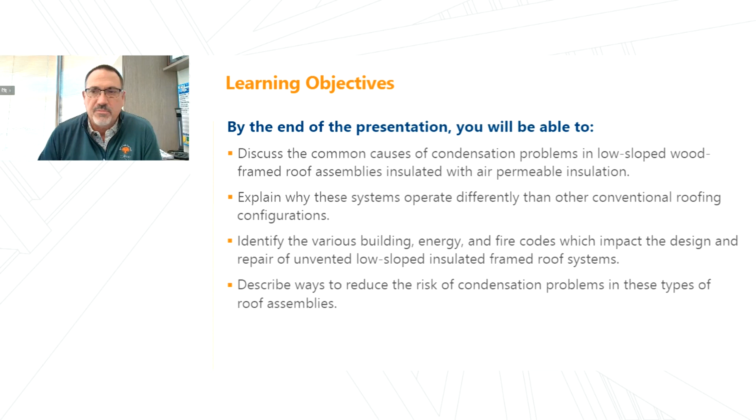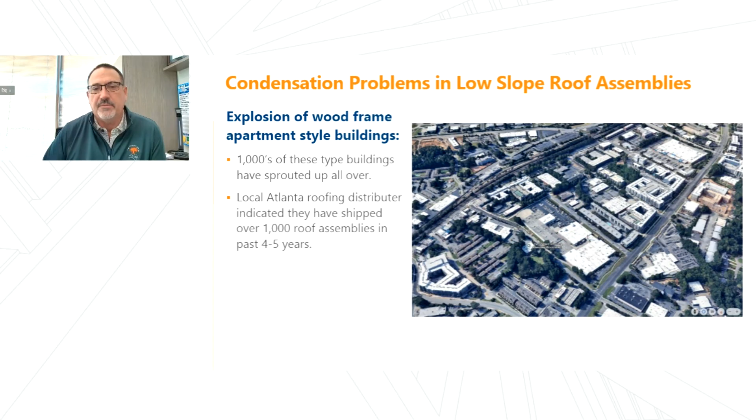We've all seen an explosion of these wood frame apartment style buildings in every city that you've lived in, and they kind of sprouted up all over the place for a variety of reasons. I've got a couple good friends of mine who are roofing contractors. One friend is a local Atlanta roofing distributor, and in the last 4 or 5 years he was telling me that they've shipped over 1,000 of these types of roof assemblies just in the Atlanta metro area. So it's a lot of buildings that have this type of roof assembly.

The problems with condensation have occurred in the past with some of the more northern climates where you might think condensation may be an issue. But we're starting to see and experience these same problems here in the Southeast and other parts of the country. Maybe it just doesn't take, we don't have as many days in the winter where it's cold for the condition to form, so it just takes a little bit longer to happen than up in the north.

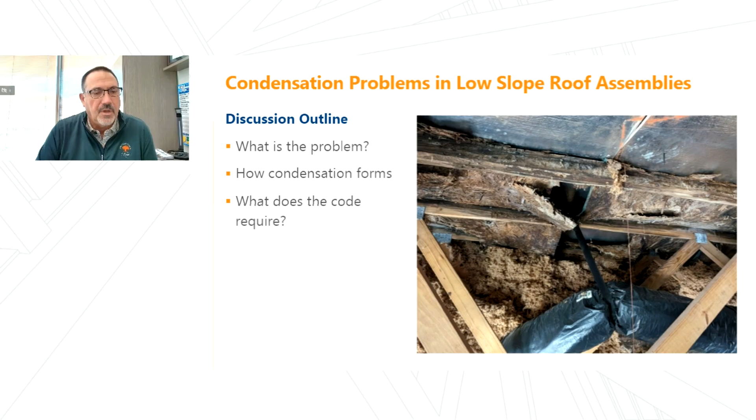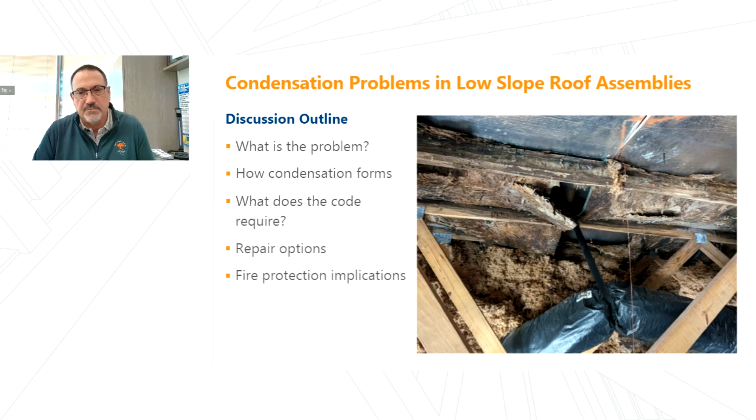So the outline for today's presentation: we're going to talk about what is the problem, how condensation forms in these roof assemblies, what does the building code require, what are some of the repair options and strategies that can be used to help resolve the problem, and some of the fire protection implications that result from the type of repair strategy you may employ.

Once again, these are wood frame apartment style buildings, typically 3 to 4 stories tall. They have a 1 hour fire rating for the primary structural members, exterior and interior walls, and the roof assembly. The roof cavity space on the top floor is filled with insulation, and there's no sprinklers.

Now, even though we're talking about wood frame construction, the problem is not unique. It happens with metal deck. It can happen with concrete decks. The issue's been around for a long time. We're just sort of seeing it maybe with a lot of these wood frame type buildings now to a greater degree.

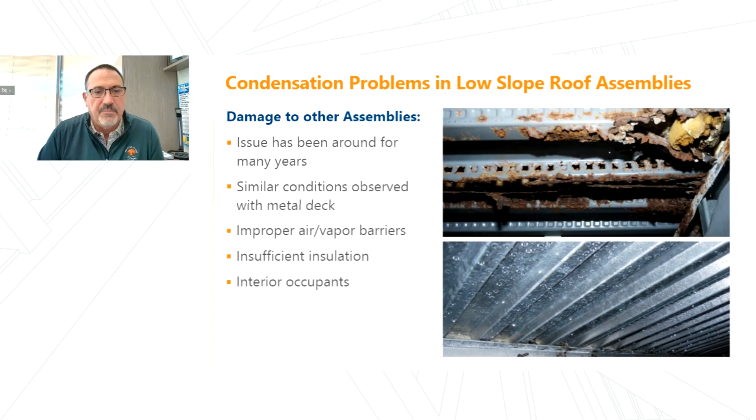It could be the result of improper air and vapor barriers in the assembly. It could be insufficient insulation. Interior occupants have an impact too—say if you have a commercial building with a natatorium or something that has a lot of interior moisture, that will certainly influence condensation and its formation.

For the typical low slope roof assembly we're going to be talking about, these are plate connected wood frame trusses generally, and they could range anywhere from say 2 feet to 3 or 4 feet thick, depending on how the trusses are constructed. This cavity space created by the trusses is filled with air-permeable insulation, usually blown in cellulose or fiberglass type of insulation.

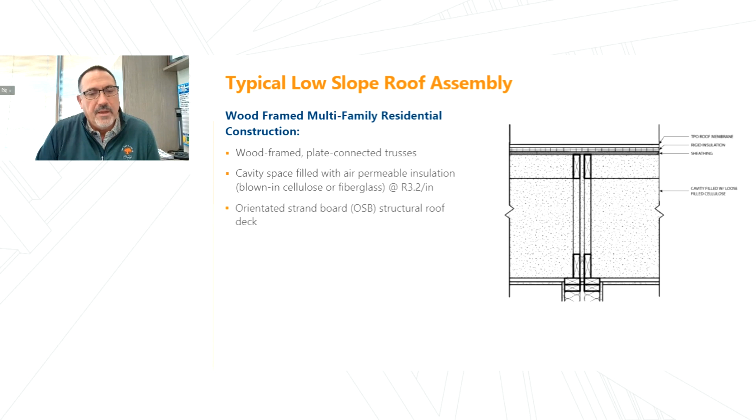There's an oriented strand board, OSB, structural roof deck that's secured to the top chords. Then a thin cover board may be used, or sometimes no cover board is used on top of the OSB. And a single-ply thermoplastic roof membrane is mechanically attached or fully adhered, usually a PVC or TPO membrane.

Again, there's no fire protection provided in this cavity space because it's filled with insulation. In addition to the space, there's also ductwork, maybe diffusers, light fixtures, exhaust ducts, and other things often located in this space as well.

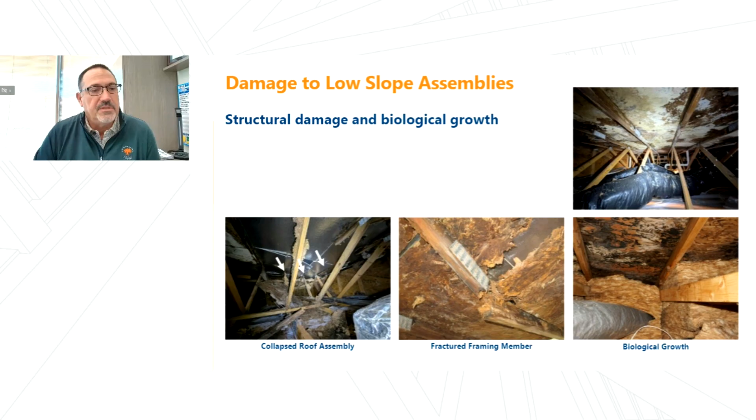Some of the damage that we see in these wood frame assemblies can be pretty catastrophic at times, and it can result in decayed, deteriorated, broken OSB sheathing. We see fractured structural members, and there can be a significant amount of organic and biological growth that forms on the interior of the space.

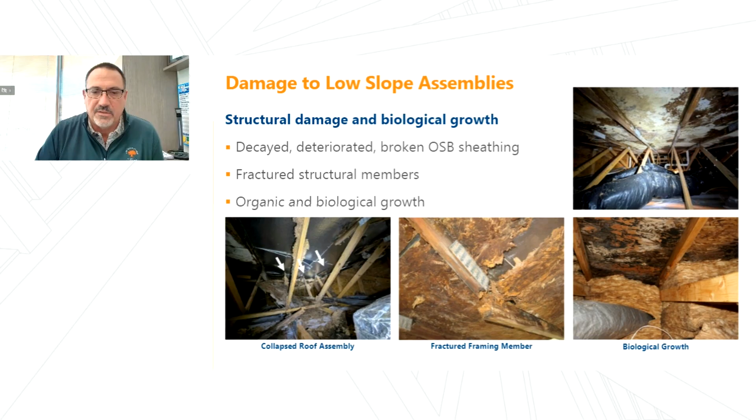So what's the source of the problem? Well, it's moisture. And how is moisture getting into this assembly? People think roof leaks might be a source of the moisture, and that's true. A roof leak can put water into this assembly, but generally a roof leak is going to be a pinpoint kind of location, a specific spot you can trace back to a condition on the roof. A condensation problem is going to be more uniform all over the whole roof area.

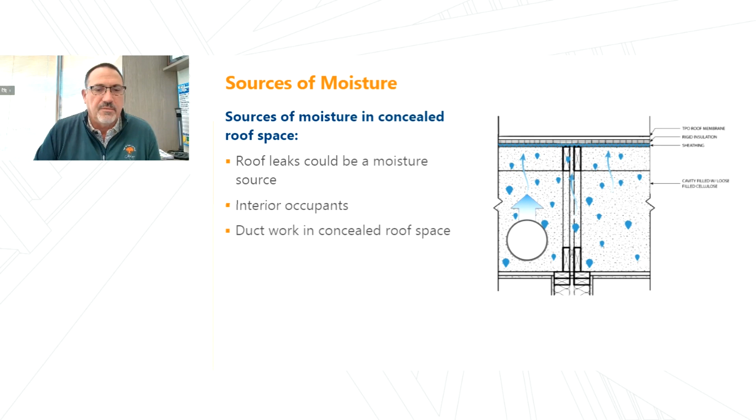Interior occupants drive a lot of the moisture, and the ductwork inside these spaces is also a source of moisture. In the wintertime, you may think of humidifiers - if somebody's living in one of these spaces and doesn't want dry skin, they might have a humidifier putting a lot of water in the air. Hot showers put a lot of steam into the space. Plants contribute a lot of moisture. Cats and dogs actually contribute a lot of moisture along with the people.

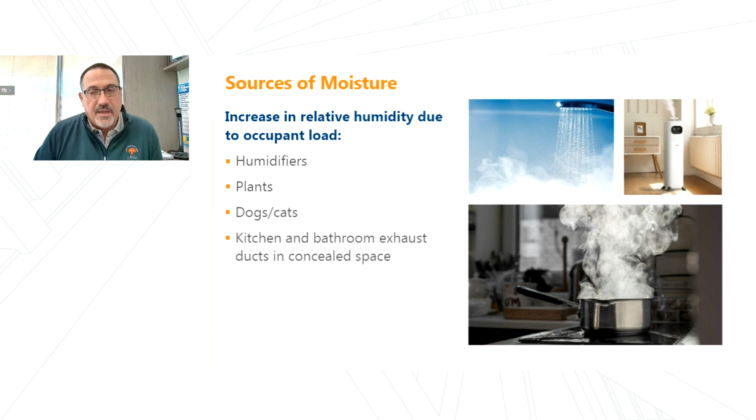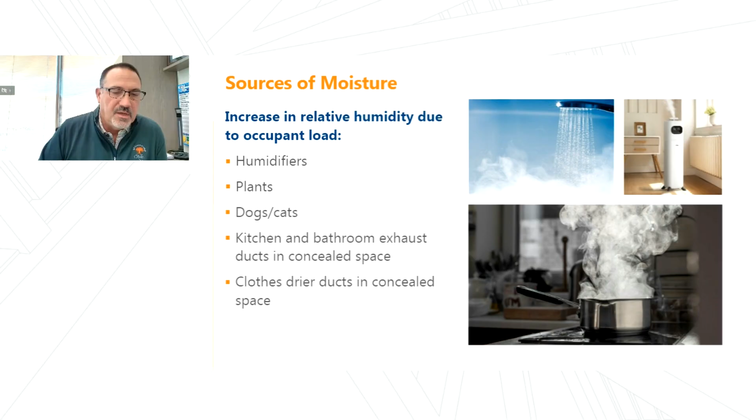We talked about the kitchen and bathroom exhausts. Ductwork runs through these spaces and transfers a lot of moisture from the kitchen and bathrooms through the spaces. Clothes dryers are probably one of the more significant contributors to moisture in these spaces - when you wash your clothes, steam goes through those dryer ducts trying to get to the exterior.

With all of these ducts, we're seeing a variety of conditions that could occur where air leakage from the ducts introduces this unwanted moisture into the space. Here are some photos of examples we've seen. A lot of them could be construction related, where they're maybe not connected or poorly constructed, but they do have a tendency to leak air even if they're constructed well. The building code allows for some duct leakage to happen with these things, even if they're constructed perfectly.

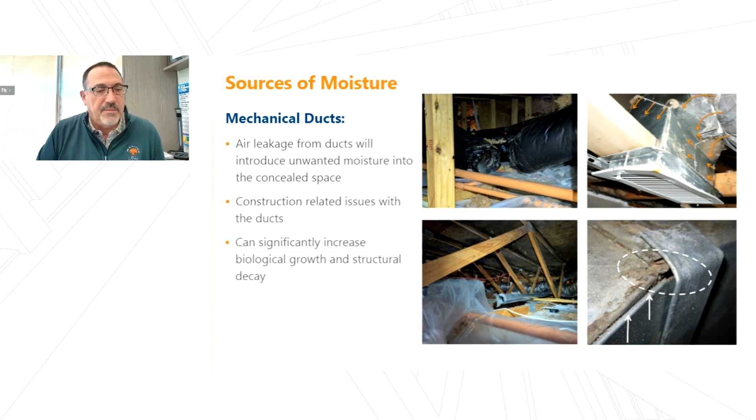They can be a significant source of the moisture that results in biological growth and structural decay of the wood members. There was an article in the IIBEC Interface magazine in November 2024, if you're interested in reading - some of my colleagues did research and wrote a paper focusing on this ductwork and the leakage associated with it, and the amount of moisture they contribute into the space and the problem.

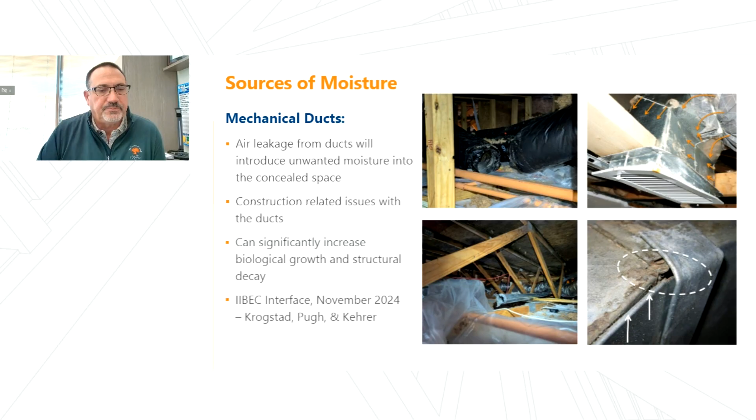So the building code requires insulation in your buildings, right? We want to be cool in the summertime, we want to be warm in the wintertime. And there's a couple different places the building code allows us to put insulation.

So that would be below the roof deck. We have insulation above the roof deck, and the code allows us to put insulation below the roof deck.

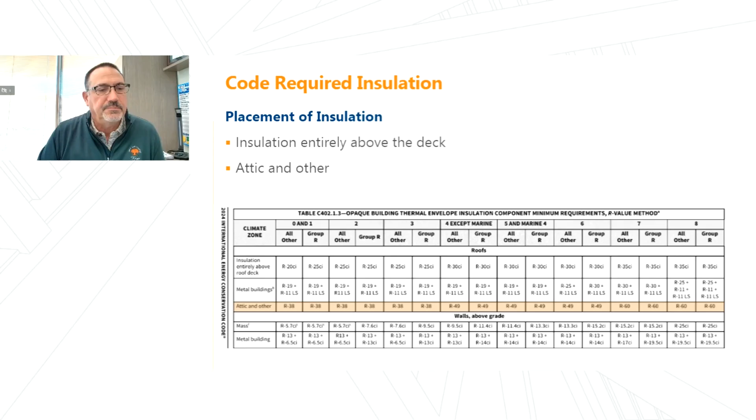It's this placement of insulation we're going to talk about here - if it's entirely above the roof deck, that's sort of a conventional low slope roof construction. The interior air from the building can actually reach the roof deck, and we're going to call that a warm roof deck, for example.

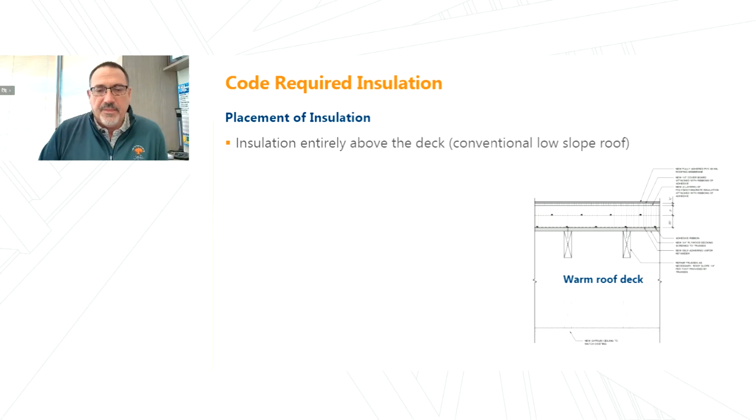And then if the insulation is below the roof deck, think of it more like your residential home with a steep slope roof assembly. The insulation is placed on the ceiling, there's this attic space, and the attics in the wintertime are cold. We're going to call that a cold roof deck, where the temperature of the roof deck is generally the same as the outside air.

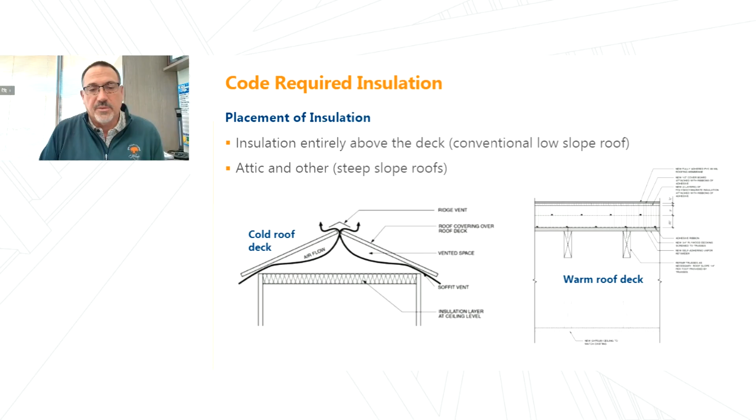So in a steep slope application with a cold roof deck, the air is pulled in from a soffit vent, and it bypasses the insulation through some baffles, maybe in the rafters. That air is exhausted out the ridge, and that is used to help ventilate any moisture that does transmit or get into this attic space. The air exhausts out and removes the moisture before it becomes a problem.

Alternatively, depending on the size of the steep slope roof, there might be additional ventilation or exhaust fans to help create this phenomena of air moving through the assembly to exhaust the space.

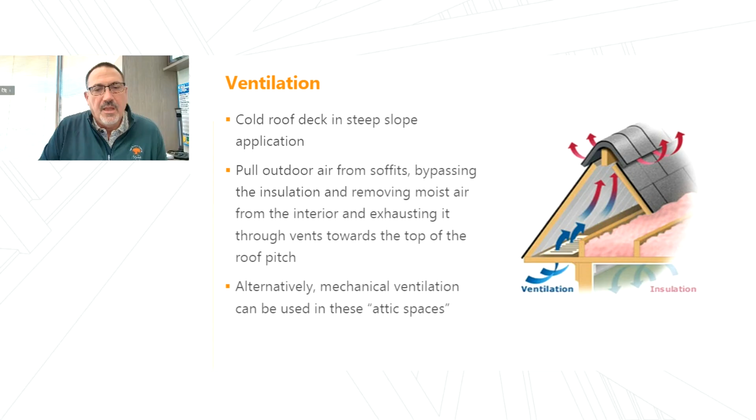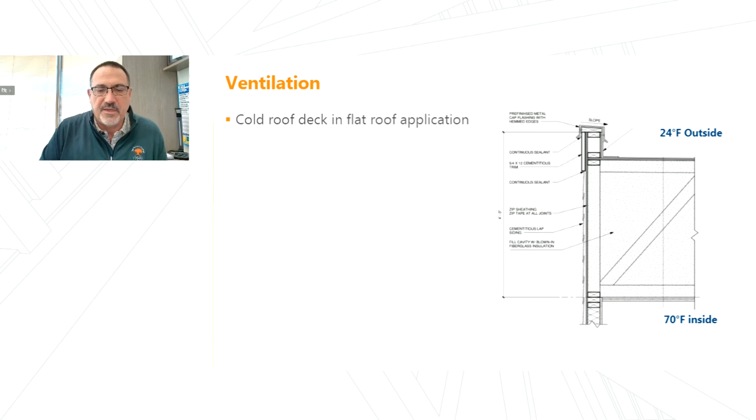When a cold roof deck is used in conjunction with a flat roof application, a low slope assembly, that's the condition we have here, where it could be 24 degrees outside and 70 degrees inside. That roof deck is going to be cold because it's not being warmed by the interior air, unlike a conventional roof assembly.

This type of assembly doesn't really incorporate any natural or mechanical ventilation of these spaces. There's no soffit or eave vent like in a steep slope assembly where you could vent the space, and there's no vertical separation of where those vents would occur, with a soffit and a ridge where warm air rises and cold air sinks to ventilate an attic space. We don't have that condition with these types of assemblies.

And then there's really no airspace to vent in the first place because it's full of insulation, and that's by design so that we keep the smoke and fire from spreading through the roof assembly.

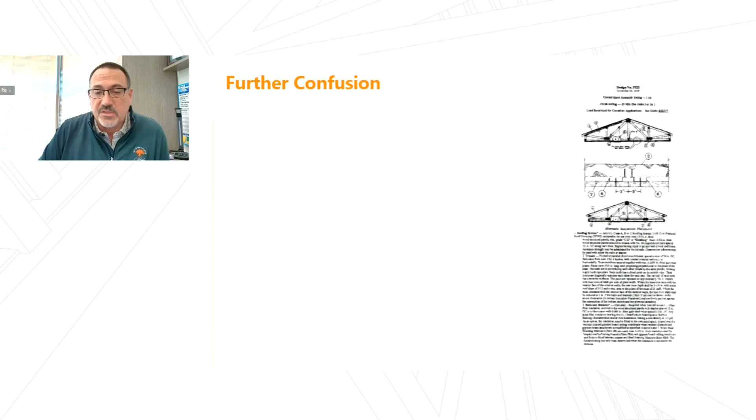To add more confusion, this was a project I worked on where on the drawings for the building, the architect defined the UL assembly for this particular building. Even though it was a flat roof, they used the steep slope fire rating UL assembly. Even in this description it talked about having to have a roof slope of a minimum of 3 and 12, despite the fact that it was a low slope roof, and it mentions the use of any thickness of insulation. That's another problem we're talking about here with why these spaces are full of insulation.

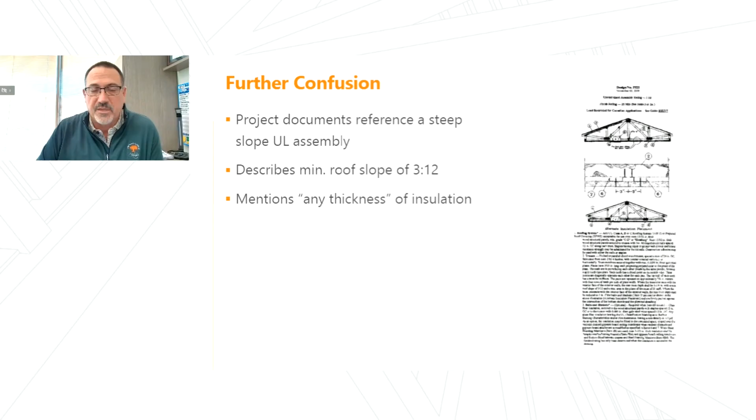So much confusion in the industry. Some more confusion I've seen happening is this distinction perhaps between a cold roof and a cool roof, where the cold roof deck is cold because it's exposed to outside temperatures, whereas with a cool roof, the membrane itself is actually cool. So it's a little bit different, and that's like the white single ply thermoplastic roof membranes that we're seeing.

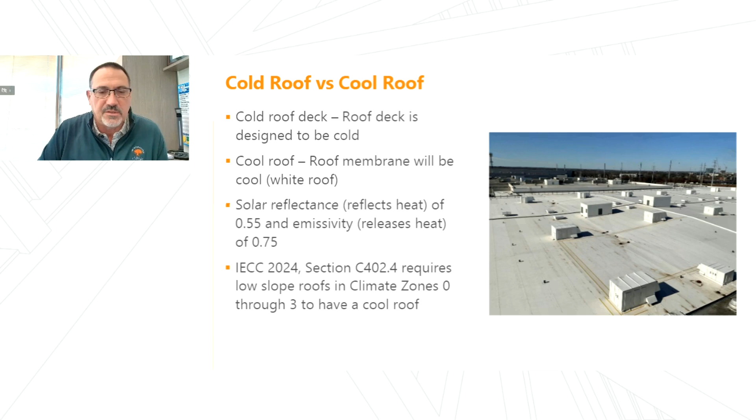They're referred to as cool roof assemblies, cool roof membrane. They have a high solar reflectance and high emissivity, where they reflect the sun, and whatever heat energy they absorb they release very quickly. That's what makes them cool. The 2024 building code requires cool roof assemblies down in climate zone 0 through 3, which is kind of my neck of the woods here in the Southeast, so that's why we see white roofs all over the place.

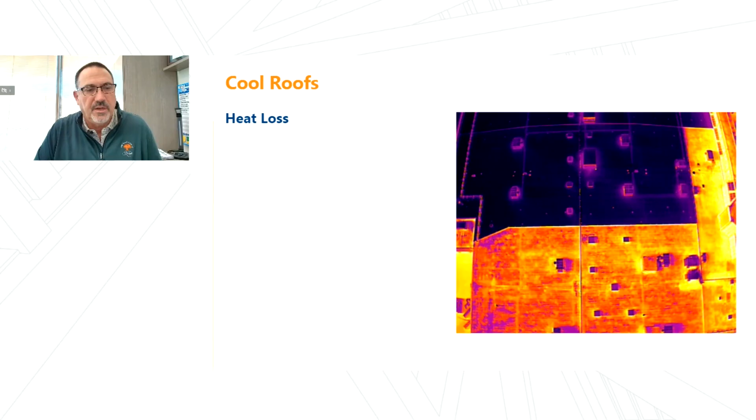With a cool roof assembly, you're talking about the heat loss that occurs. When the cool roof reflects the heat, it actually stays cooler in the winter, too, since it doesn't have a chance to warm up and hold that heat.

This is a good infrared image of a project I'm working on here in Atlanta, where the cool roof is on the top half, shown in dark purple, and the old gravel surface built-up roof is on the south end of the photo, shown in orange, where it's hot and absorbing and holding onto that heat.

Cool roofs release their heat quickly, and as it cools it can further this condensation problem, because the roof assembly is cold and not being warmed, which affects the dew point temperature of when condensation will form in the roof assembly. So when you couple a cool roof with a cold roof deck is where the problems can also occur.

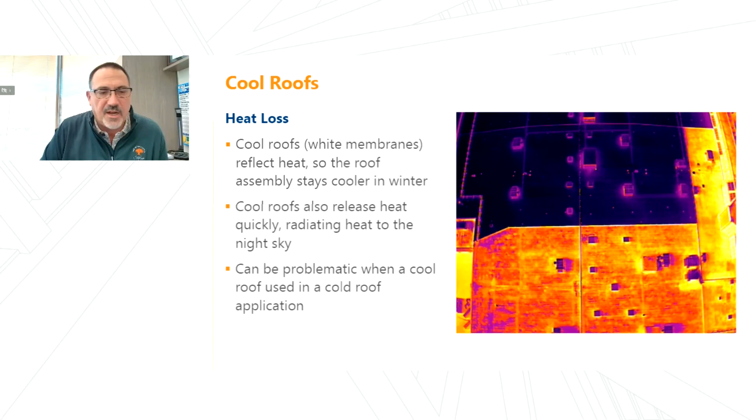So how are these conditions discovered on a building? In our experience, it happens through routine maintenance inspections, somebody up on the roof doing work, maybe HVAC or other mechanical work, or even a roof leak being chased down. Through that process, the building manager or owner might contract a roofing contractor or manufacturer to take a look, thinking they might have a roofing problem. But I also recommend contacting your local building enclosure consultant as well.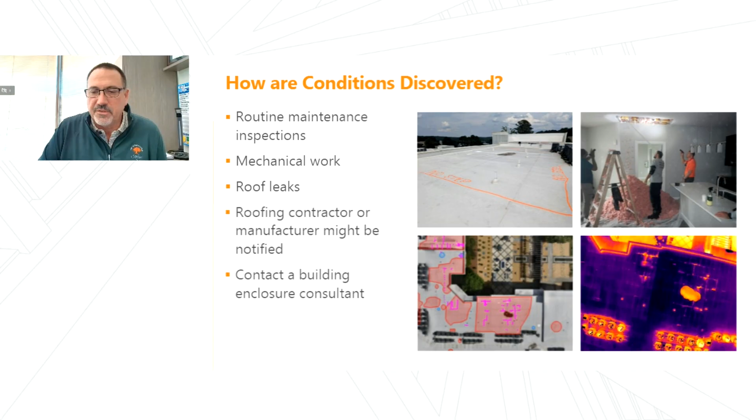So what do they look for? What you're seeing with these assemblies initially is determining whether it's a roof leak at first. Those are a little easier to identify because they're kind of pinpoint locations.

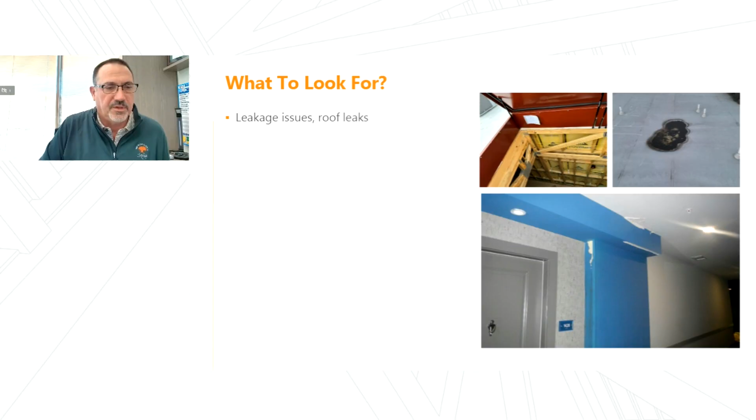You might also see some cracking in the drywall on the ceiling on the top floor, where if a truss broke or something, and it's sagged and isn't able to support the weight of itself anymore, you can see cracking drywall. There might be visible signs of blown-in insulation in the cavity space, whether it's around light fixtures or a diffuser.

You might see the blown-in insulation, which gives you an idea that you have this type of roof assembly. You might also see some organic or biological growth forming around those light fixtures or diffusers, where condensation is maybe occurring.

If you have a roof hatch and you come up through it and notice that you can sort of see the roof construction, and you see that from the roof deck to the white membrane on the outside there's not really an offset in distance, that would give you another good indication that you probably have this attic space, or this concealed space, full of insulation, with all your insulation below the deck.

There might be some ponded areas of water on the roof membrane where, say, something was sagging or not able to support itself well. You'd have some ponded areas away from roof drains for no reason.

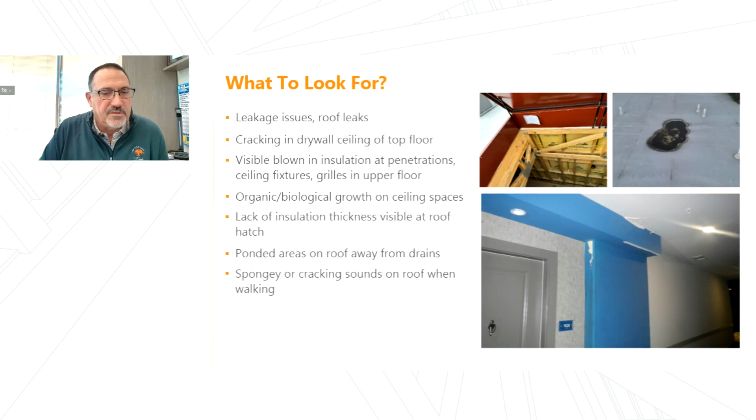If that's the case, you might also need to pay attention to what's happening if you walk into an area that all of a sudden has a problem, and you may need to try to locate where those trusses are and maybe try to step on those. So definitely need to be careful. I've actually been on a couple roofs where I've stepped on the trusses and broken them.

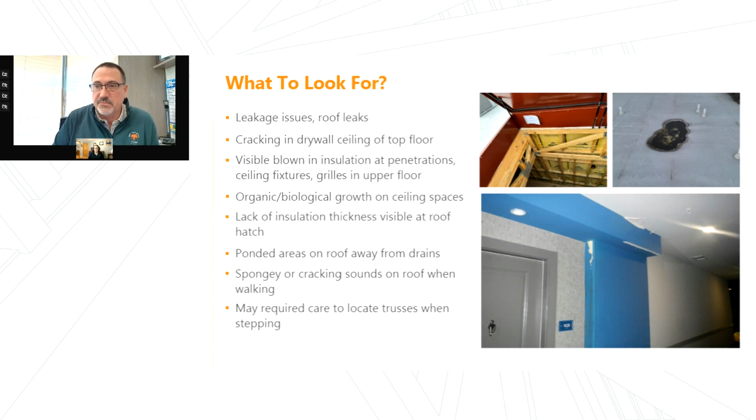So at this point, I'm going to hand it over to Liz, and she's going to get more into the details of some of the air movement and issues as well.

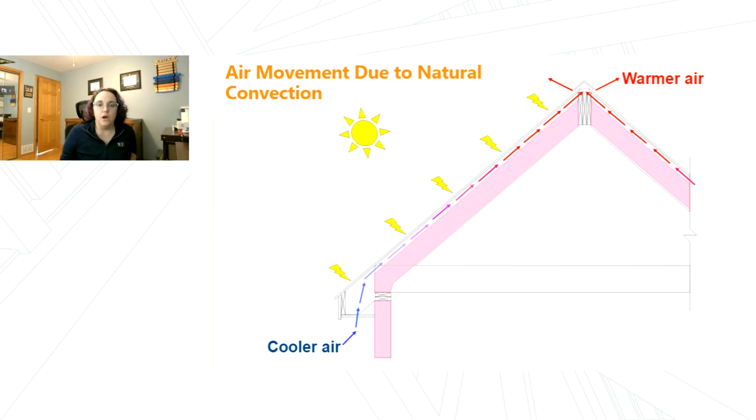In fact, research has shown that most of the air movement through attics actually occurs due to wind as opposed to natural convection. But it's a similar phenomenon, where you have wind entering the roof at one end and exiting at the other end.

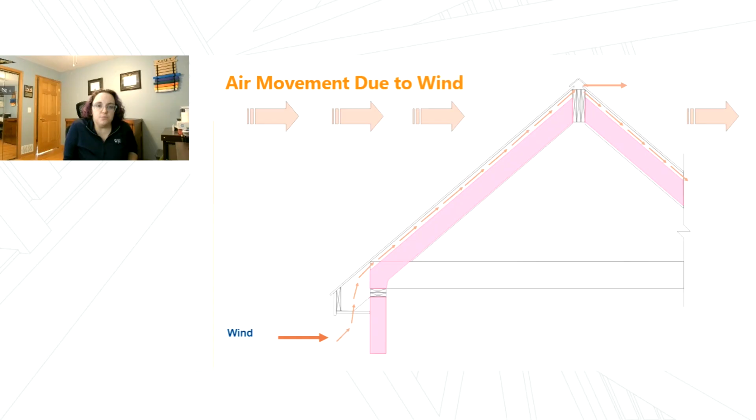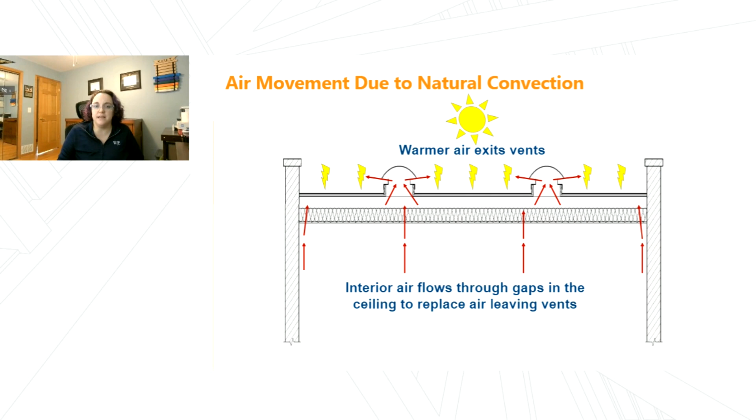In a low slope roof, the physics still applies, but because the roofs are shaped differently, the results end up looking different. Since there's no elevation change between that soffit and ridge vent, the air will still move vertically, but in this case, if someone tried to ventilate a low slope roof, warm air would exit through the vents and then be replaced from underneath by interior air flowing into the cavity through any gaps in the construction.

Similarly, air can be drawn from the space due to wind and be replaced by warm, humidified interior air.

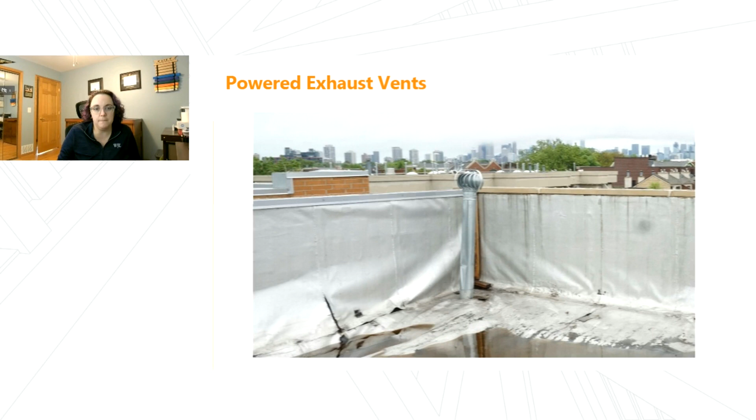One popular theory that some people have in trying to remedy these issues is to add powered exhaust vents in hopes of increasing air movement and dissipating moisture in the assembly. This does induce increased airflow, but unfortunately it actually makes matters worse. By removing additional air from the framing space, the powered exhaust vents in turn draw additional humid interior air into the framing space to replace it, increasing the amount of moisture present in that space.

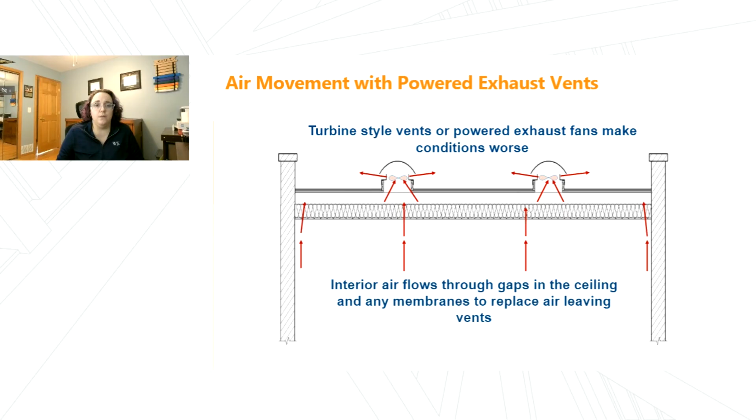And then, as Chris mentioned, the assemblies we're talking about today have the truss space completely filled with insulation such that they don't need to be sprinklered under NFPA 13. Once you fully insulate the space, all ventilation potential really goes out the window. And similarly, if you have draft stops or other ways of subdividing that space, you're not going to effectively be able to ventilate it. So effective ventilation in a low slope roof is extremely difficult to achieve.

One of the biggest and unfortunately least recognized factors influencing the problem is the presence of ductwork in the framing space. This can be things like kitchen and bathroom exhaust, clothes dryer exhaust, but not to be discounted, supply air ductwork is generally placed in this location in multifamily residential applications so that the ductwork is accessible if you ever need to do maintenance or repairs.

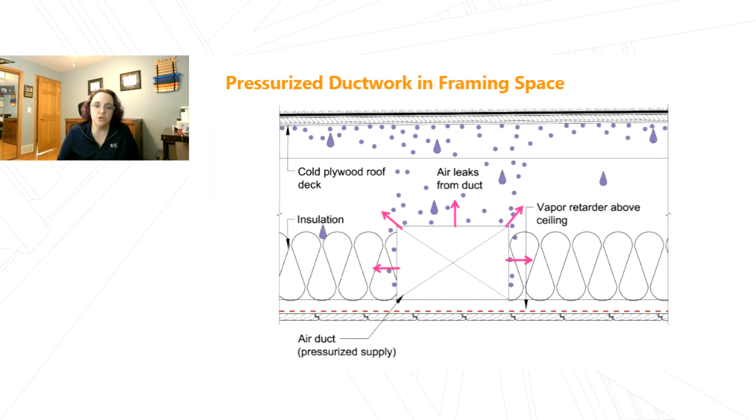So the code gives us some guidance, but also some confusion on this matter. First things to note, the International Building Code has a ton of terminology regarding attics, roofing, rafters, etc. And it's not consistent. It varies both within the International Building Code and across other standards and roofing industry documents.

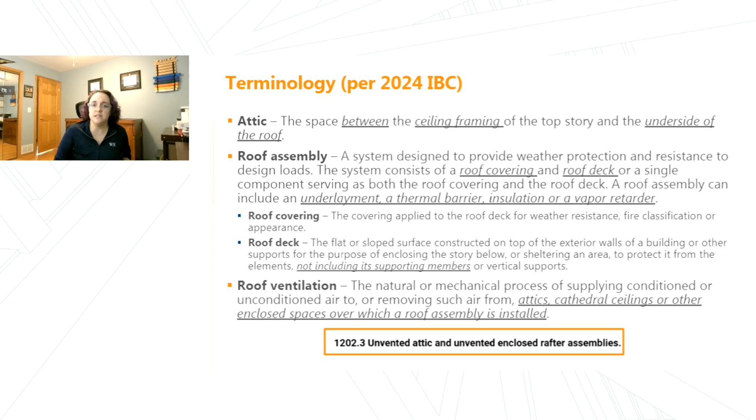As a result, there's a great deal of confusion as to how and when to apply different provisions of codes and standards. And especially steep slope roofs versus low slope roofs and things of that nature.

Also worth noting, provisions for unvented enclosed roof framing assemblies didn't actually exist in the International Building Code until 2015, or 2009 for the residential code. These provisions have been evolving since that time, but they still haven't come around to address all the nuances that can be problematic in these assemblies, especially when they're fully insulated, to avoid the need for sprinklering under NFPA 13.

The International Building Code broadly offers 4 options for where to place insulation in an unvented roof assembly. Only 2 of them apply to our NFPA 13 use case, so I'm going to cross out the others, option 1 and 3. Those options include air-impermeable insulation in the framing space, which is generally a combustible product such as a spray polyurethane foam.

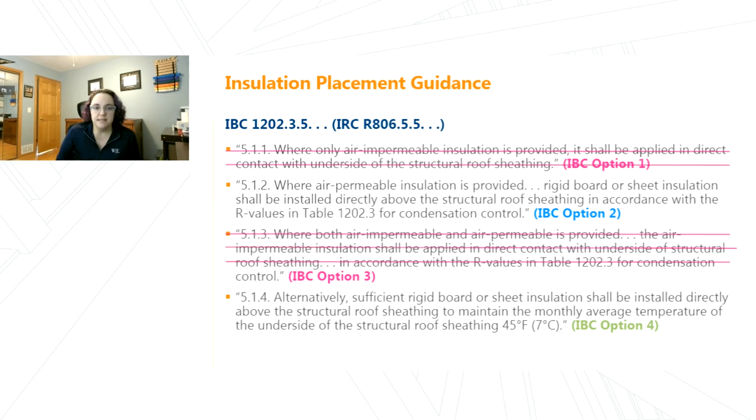The remaining options, which I refer to as option 2 and 4, based on the chapter of the code in which they're found, outline how to place insulation in your roof deck in this approximate manner, where you have the trusses completely filled with an air permeable insulation and there's rigid insulation placed above the deck. Option 2 directs the designer to install a prescribed amount of insulation based on what the code says, whereas option 4 has the designer perform calculations to determine how much insulation is needed to maintain the roof deck temperature above 45 degrees Fahrenheit in order to mitigate condensation risk.

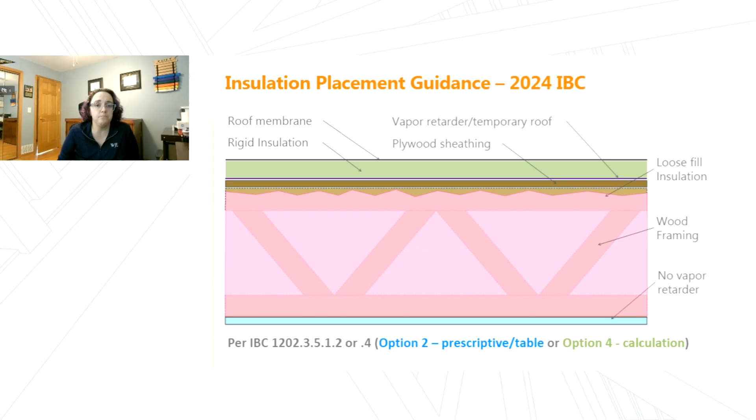From 2015 to 2021, the table in the code looked something like this, where it told you a set R value minimum for how much rigid insulation to put in your roof assembly. So as an example, I'm in the Chicago area, climate zone 5. I would go to the code and say, throw R20 above the deck and I'm good to go. Easy as that.

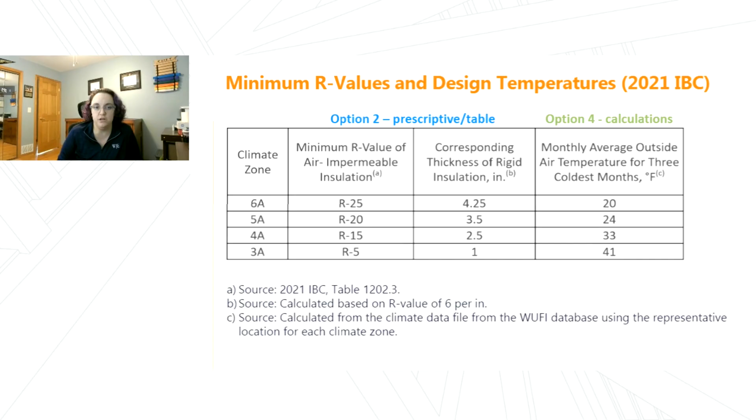Internally, we did some research to compare outcomes of these different code compliance paths by creating hygrothermal models of assemblies in specific cities with different amounts of rigid insulation. And what we found was that in any assembly where your framing truss space had more than 7 inches of fiberglass batt insulation, there's a subset of roof assemblies that comply with code option 2. In other words, it has that minimum R value, but they don't comply with option 4, meaning that the predicted sheathing temperature is cold and will be susceptible to condensation.

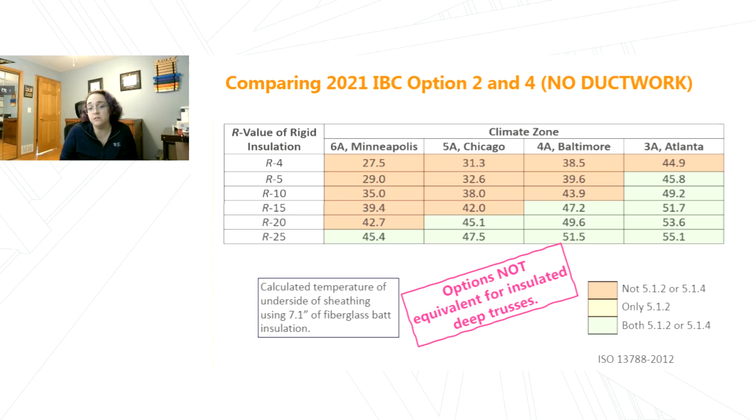Since the trusses we're discussing for the building types today are almost always deeper than this, and since they're generally filled with insulation to avoid sprinklers, you're always going to have this subset of options that don't match. In other words, the code is not consistent. And this is a little bit of a hazard point because it's not clear that designers or others in the industry are widely aware that these 2 compliance paths do not yield comparable results.

The 2024 version of the building code changed the table. So rather than a prescriptive R value above the deck, this tells the designer to provide a certain percentage of the assembly's insulation value above the deck. Although this is more logical and it attempts to take into consideration just the sheer amount of insulation you might have in that framing space, it can still have some limitations.

First, it doesn't account for duct leakage in the framing space. And for that reason alone, we would strongly recommend that a building enclosure consultant be engaged on any of these projects and that some analysis be performed to assess the performance needs of each building on a case-by-case basis.

We're actually currently performing some in-house research to develop a calibrated methodology for doing hygrothermal simulations that account for the ductwork. But also the percentages here just really aren't practical for many climate zones.

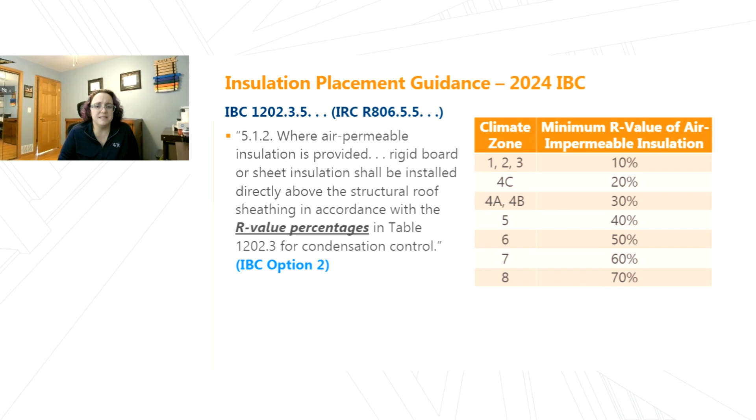To dive a little deeper, in a cold climate zone, the results can actually be very conservative. As an example, in my climate zone 5, if you have a 4-foot deep truss space, this code provision would tell you to need R65 of rigid insulation above the deck, which can be an astronomically high amount. It can be cost prohibitive and induce challenges regarding constructability.

Conversely, in hot climate zones, the recommendations may not actually be conservative enough. The amount of rigid insulation provided above the deck in a warm climate zone, as shown here, may not be sufficient to maintain the deck above the dew point temperature, especially if ductwork's present in that space. So the code has come a ways, but it's not necessarily the all clear that many designers may think it is.

As Chris discussed earlier, when these complicating factors aren't well understood, the results can be pretty catastrophic, and it can occur in a wide variety of climate zones. We've seen extensive damage on buildings often within less than 5 years of initial construction. Sometimes it's reported as a suspected roof leak, sometimes someone steps through the roof deck.

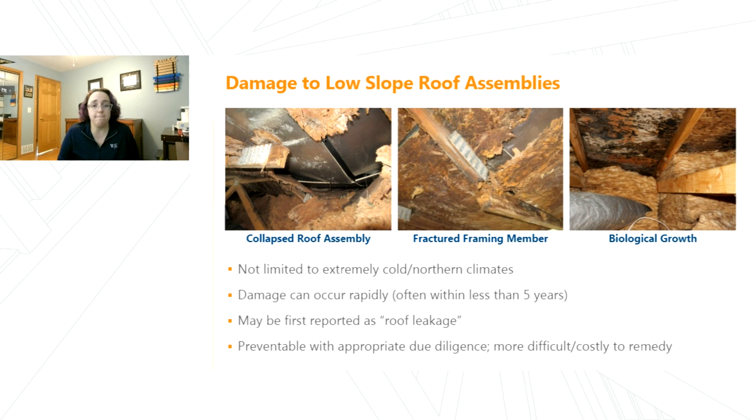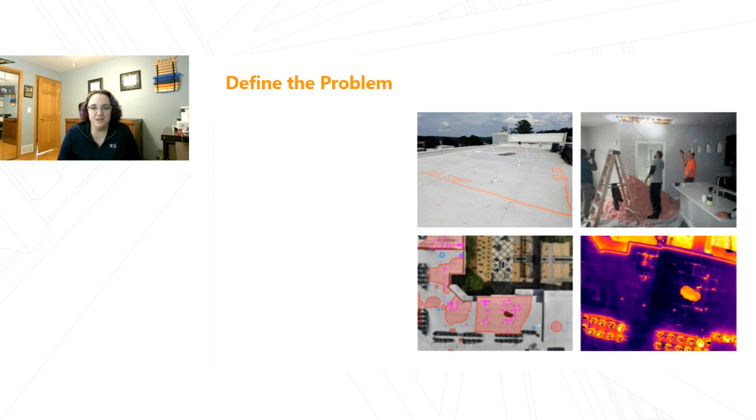So next we can get into what to do about this problem. As a design professional, it's important to dig into your toolbox and investigate the problem to figure out what's going on. That can include document review, interior and exterior visual surveys, locating soft regions of the roof, inspection openings, etc. As a building owner, a good first step would be to retain a qualified consultant or contractor to do this for you.

Next, you can evaluate the feasibility of different strategies. If the extent of damage is localized or minimal, a localized repair approach may be feasible. More on that in a moment.

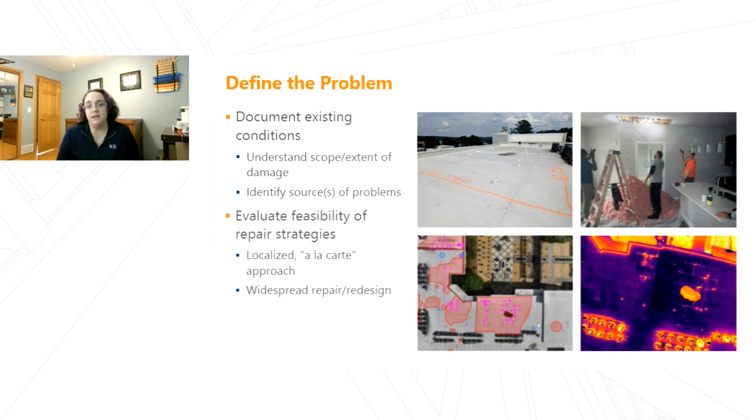If damage is more widespread or severe, repairs will need to be designed accordingly, and careful consideration needs to be given, not just to replacing the roof assembly itself and addressing structural damage, but also placement of ductwork, insulation, sprinklers, and other critical components.

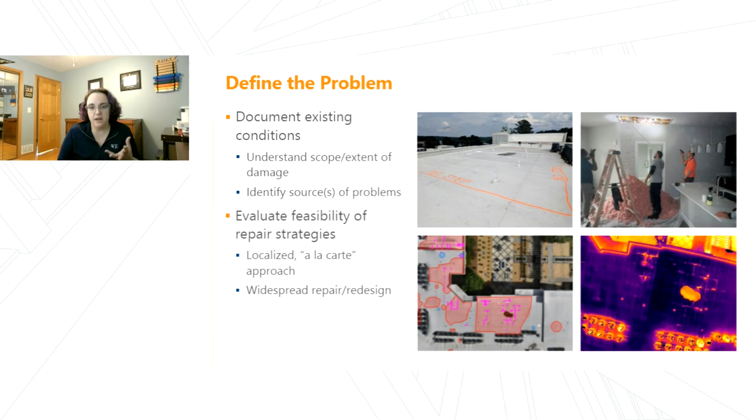If a localized repair approach is undertaken, it's critical first to determine the causes of localized decay. That might be particular leaky ductwork, disconnected exhaust vents, localized roof leaks, etc. A localized repair will include replacing damaged deck and structure and patching the roof, which will require verifying warranty applicability and any requirements from the roofing manufacturer.

It's important to recognize, though, with condensation problems of this nature, it's very common for there to be more than one source or more than one cause. So it's critical to recognize that this type of an a la carte approach may actually become an iterative process where you continue chasing additional sources and additional spot repairs. It's important to weigh the pros and cons of trying a more minimal repair approach with the expectation that condensation could likely recur and additional repairs may be needed.

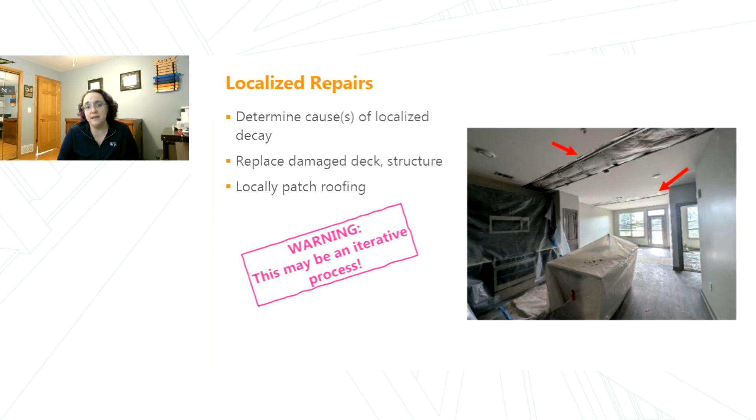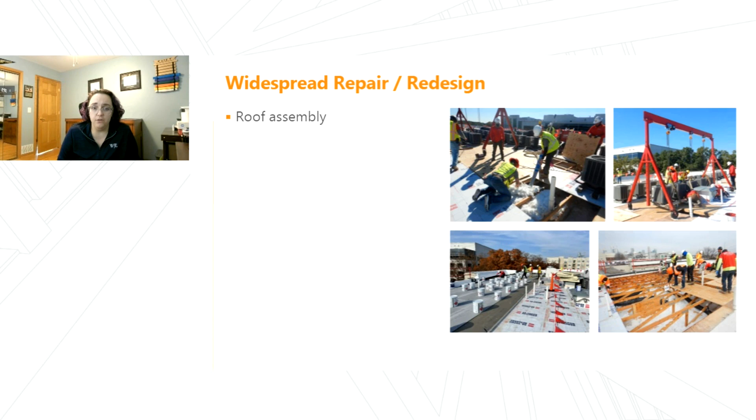In the event widespread repair or redesign is required, this would involve addressing the roof assembly itself, repairs to the underlying structure, including the deck or framing members that have been damaged, which may need to be repaired or replaced. Typically involves retaining an industrial hygienist. There can be a lot of biological growth in these spaces, may require removing insulation and remediating growth.

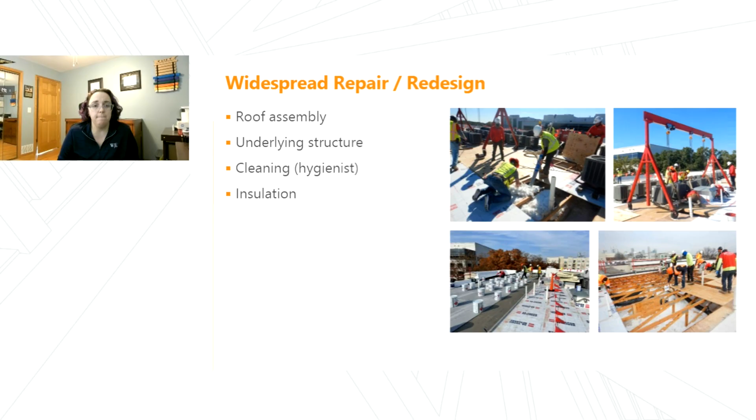Placement of the insulation becomes a critical point, as we'll get into in a moment. Also, ductwork - if there's ductwork present in this space, figuring out what to do with it, whether it's going to be relocated, sealed, etc. And the presence of fire sprinklers in the space becomes a critical consideration. All of these, in case you were guessing, can be very costly and disruptive when you get to the widespread repair and redesign approach.

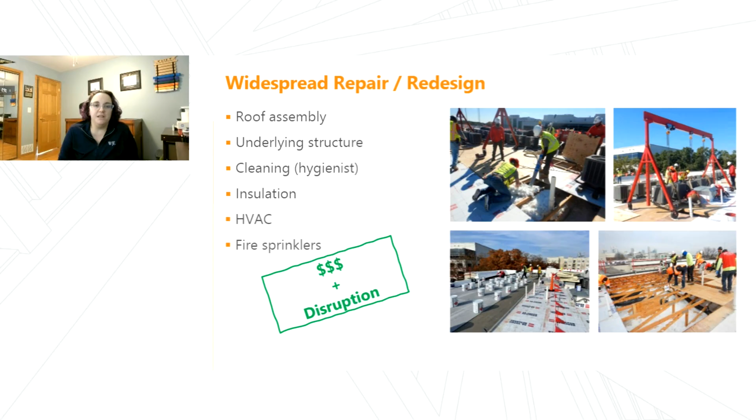Broadly, there's two ways you could approach this problem. The first would be to say, I still don't want to install sprinklers in this enclosed space. In that case, we'd advise that analysis by an enclosure consultant is a must in order to determine the appropriate insulation placement to mitigate your condensation risk. You could consider relocating ductwork below the ceilings, either exposed for kind of an industrial vibe or located within soffits. This would require creating an air barrier at the ceiling so that any leakage doesn't go into that framing space.

That would also require sealing all penetrations and demising walls, and it's really only achievable with tall ceiling heights. As discussed earlier, one of the big go-to options in this situation would be to install additional insulation above the roof deck so that it remains closer to the interior temperature.

As we discussed briefly, that can become impractical and cost prohibitive in some northern climates, with extremely high degrees of insulation required to overcome just the sheer R value of blown-in insulation in the truss space. There are some extremely high-performance products that can be considered, but they come with very steep price tags.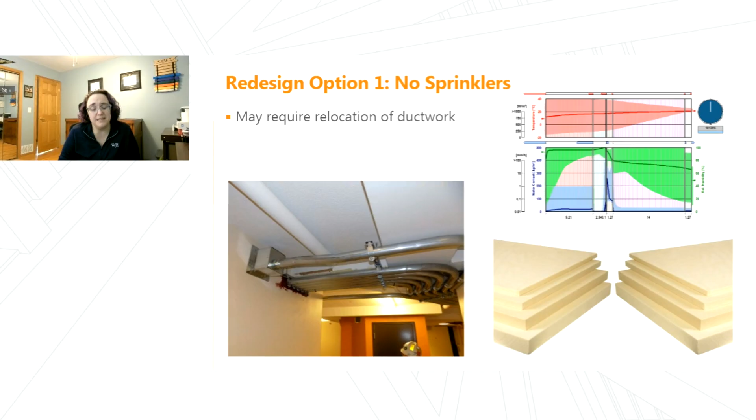And for that, I will hand it over to Paul to discuss those implications. Thank you, Liz. My name is Paul Roland. I'm with the Fire Protection Unit here with WJE, residing in the Dallas-Fort Worth Metroplex. So yeah, we're going to go over the fire protection issues associated with this condensation problem.

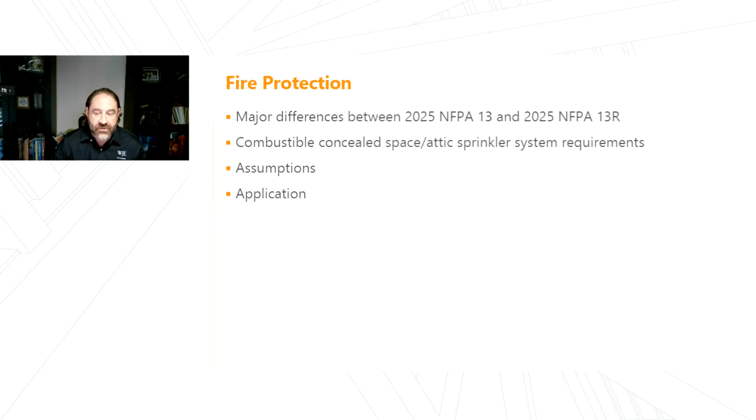So we're going to kind of go over what the major differences are between NFPA 13 and NFPA 13R. Get into the requirements of combustible concealed spaces or attics. Talk about some assumptions that are made or should not be made when trying to correct this issue, and then talk about a real-world application and how this all applies.

So NFPA 13 is going to be your standard for sprinkler systems, and then 13R is going to be your standard for sprinkler systems in low-rise residential occupancies. So the two sound similar, but they're quite different.

NFPA 13 provides the minimum requirements for the design and installation of fire sprinkler systems and exposure protection, whereas 13R is specifically for sprinkler systems in residential buildings 4 stories in height and not exceeding 60 feet in height as well. The primary focus of NFPA 13 is geared towards life safety and property protection, whereas your NFPA 13R systems are strictly for life safety.

And that kind of explains why there's some omission permitted in NFPA 13R that aren't necessarily in NFPA 13. As far as the IBC is concerned, the building code, if you have an NFPA 13 system, you are going to be considered a fully sprinklered building. If you have an NFPA 13R system, you're not necessarily considered a fully sprinklered building, again, because of the omissions permitted by that code.

13 doesn't have any limitations as far as when you use the code or what type of sprinkler system it is, whereas 13R, you are going to be limited to the occupancy of the building, which is residential, and that building is limited in height to 4 stories or less or 60 feet.

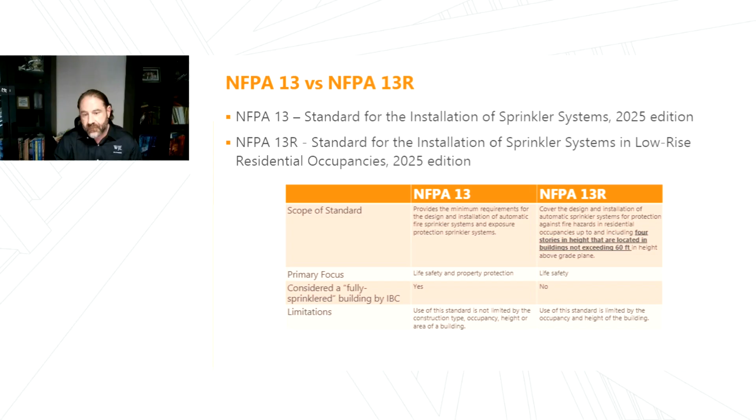So as it relates to combustible concealed spaces and attics, if you're looking at NFPA 13, sprinklers are going to be required throughout the entire building. Very few exceptions. For instance, concealed spaces of non-combustible and limited combustible construction having no access shall not require sprinkler protection, and concealed spaces filled with non-combustible insulation shall not require sprinklers.

So again, if you have a concealed space or an attic that's completely non-combustible construction, so you have steel construction, you don't need sprinklers. If you have a combustible concealed space or attic and you fill it with that non-combustible insulation, you can omit sprinklers there. If you put combustible insulation in your attic, you're allowed to, but now you have to put sprinklers up there as well.

Whereas 13R, you don't need to put sprinklers in attics or concealed spaces that are dedicated exclusively to and containing only dwelling unit ventilation equipment, and they're not intended for living purposes. And this is regardless of the construction type. So if you have an NFPA 13R system and you have a combustible or non-combustible concealed space or attic, you don't need sprinklers.

And something to note is that the 2018 IBC was amended to omit attic sprinklers in the same ways that NFPA 13R does. So they're kind of matching now.

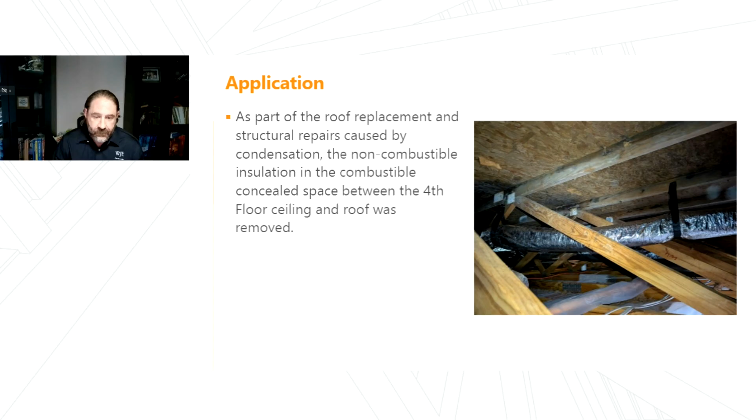So how does this apply to the real world? As part of a roof replacement and structural repairs caused by condensation, one of the solutions is to take all of the non-combustible insulation out. So now you're left with a combustible concealed space or attic. And again, a combustible concealed space will require sprinklers per NFPA 13.

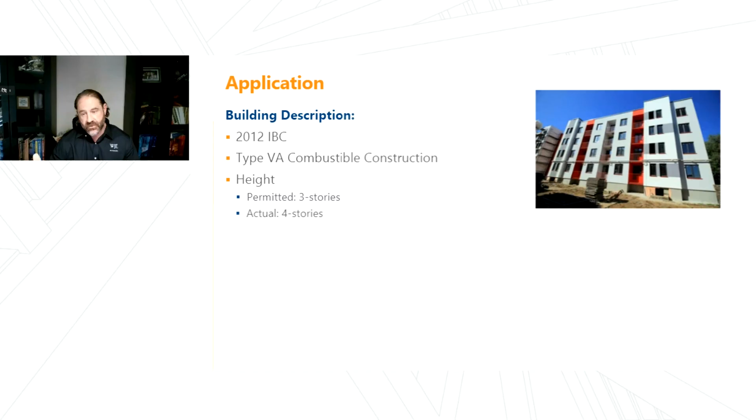Here's another real world example. Let's say you have a building designed for the 2012 IBC, type 5A construction, which is all combustible material, so a wood building. The picture on the right shows a 4-story building. The IBC permits a residential building to be 3 stories. So when you look at it and see it's 4 stories, you know there's something going on there.

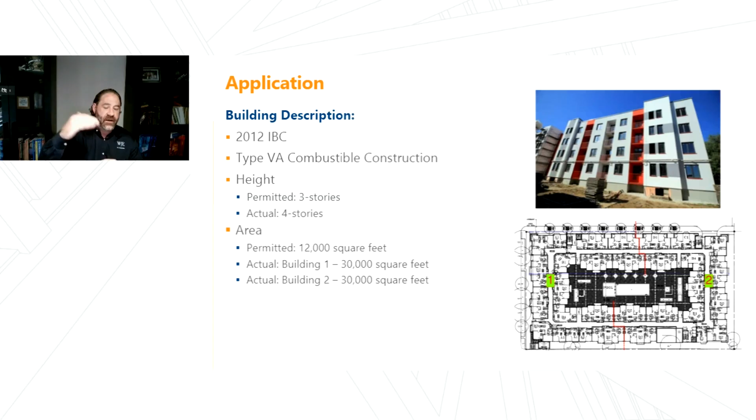Then you look at the area, and the IBC allows these residential occupancies to be 12,000 square feet. Your building is 2 buildings divided by a firewall, each side 30,000 square feet. So the stories exceed what's allowed by the IBC and the area exceeds what's allowed. There's got to be some trade-offs allowing the height and area to be increased, even though it's residential. So it eliminates that it's a 13R system. Based on those two things, you know you have an NFPA 13 system because of the IBC trade-offs.

So again, your existing building doesn't have a sprinkler system in the attic because it had non-combustible insulation in it. Now that's been removed, and since you know you have an NFPA 13 system, you have to go back with a sprinkler system in the attic.

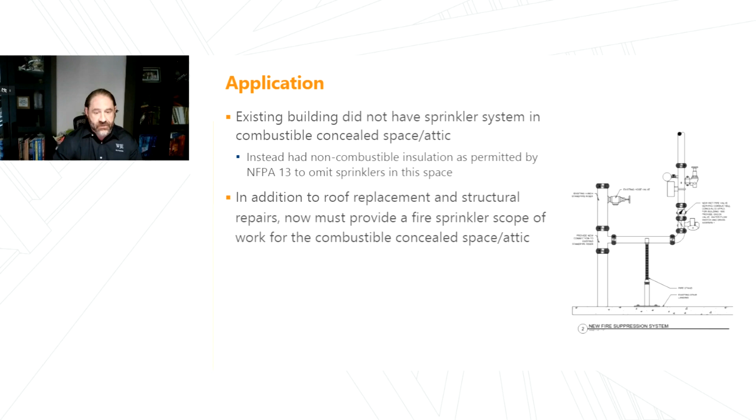Some things to consider when putting in the sprinkler system in the attic: do you want a dry pipe system or a wet pipe system? Typically, you'd put a dry pipe system in an area that gets below 40 degrees. However, if you can prove through calculations that the insulation around this attic or concealed space can maintain that temperature above 40, you can go with a wet system.

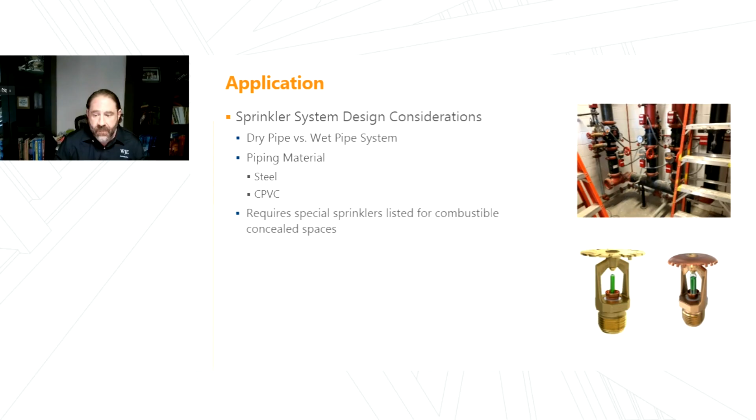Some other things: draft stops. Do you have draft stops? Are draft stops required? Demising walls between the units are not always considered draft stops. If you have demising walls, which are typically required to be rated going through your ceiling and up to your roof deck, you might look at those and think, oh, those are my draft stops. Well, your draft stops have to divide your area into 1,000 square foot segments, whereas if you're just separating apartments based on demising walls, you might have a 2,000 to 2,500 square foot apartment. So you can't use those demising walls as draft stops.

So again, you've got to look into the draft stops, see if they're required, if they are spaced properly, and whether you have to add in more.

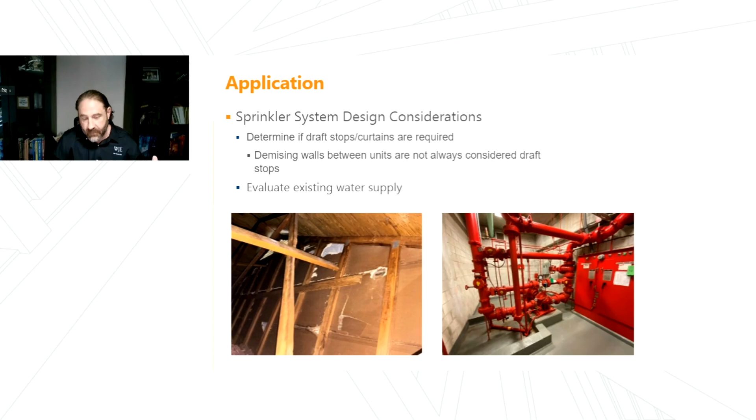You have to evaluate your existing water supply. Now you're adding a sprinkler system at the top of your building. What drives the sprinkler system demand is the flow and pressure of the sprinkler system, and the higher you get in elevation, the more pressure you're going to need to support it. So if you're putting a new sprinkler system at the top of a building, that's obviously going to require a lot more pressure than the existing systems in the building. It's just something to look into—might be another cost impact, might require a fire pump. You don't know until you do it.

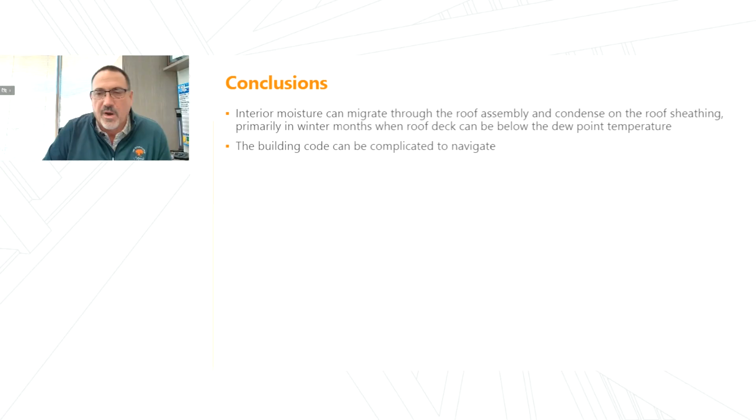The building code can be complicated to navigate, and trying to make sure that you fulfill all the requirements can be difficult. The building code also does not address leakage through the ducts in this concealed space, and we think that's one of the leading drivers to some of the damage that we're seeing.

There's also a number of factors that can influence the moisture load: the occupants, the ducts, the temperature, the construction of the building. In these types of spaces, if a particular tenant lives in a unit for a long time with no issues, and then they move out and a new tenant comes in with different habits and changes, something could change with the building where there never was an issue before, just because of how the interior occupants change.

The repairs to the building can often result in evaluating many other aspects of the building, such as the fire protection, the sprinklers, the mechanical system. So it's a multidisciplinary problem to resolve.

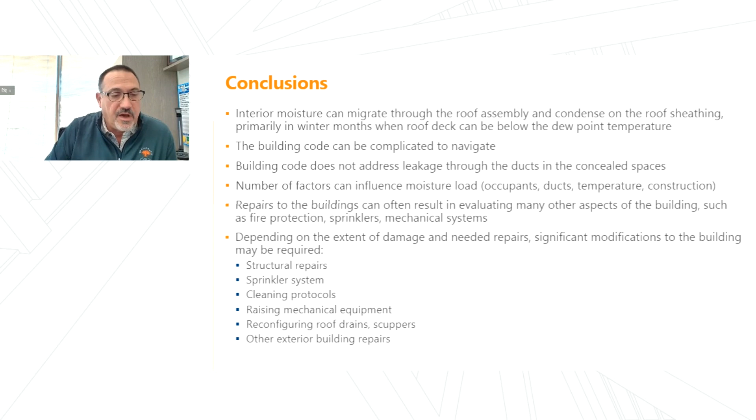Depending on the extent of the damage and the repairs needed, significant modifications are sometimes required to the building. That can include structural repairs, sprinkler systems, cleaning protocols, and getting a hygienist involved, perhaps raising condensing units and mechanical equipment on the roof, reconfiguring roof drains and scuppers if you're adding more insulation on the top side, and getting into other exterior building repairs just to implement the work in general.

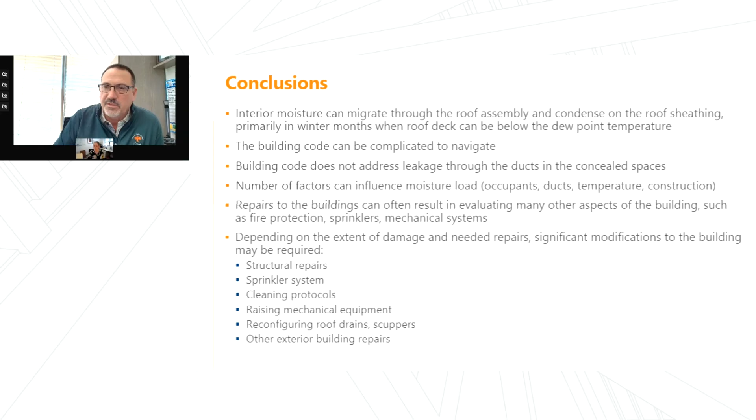Would vented attics resolve the ductwork condensation leakage?

I can jump in on that. The challenge is in a low slope application, such as the one we're discussing, it's very difficult to actually effectively vent the attic in the first place. If you could effectively vent it, as people often do in steep slope assemblies, that can help, but it just doesn't work. The physics doesn't work in this particular case.

This is a related question: Do attics typically vent in from the soffits and out through the ridge regardless of the interior-exterior temperature gradient?

I would say generally yes. It's the way that the air flows over a steep slope roof - it's going to draw it out of the ridge vent and pull it in from the soffit vent. So it has to deal with the physics of how air is flowing over that steep slope roof. I believe something like 80% of that air movement is actually driven by the wind as opposed to temperature gradients. So the temperature gradients are a piece of it, but not the biggest piece.